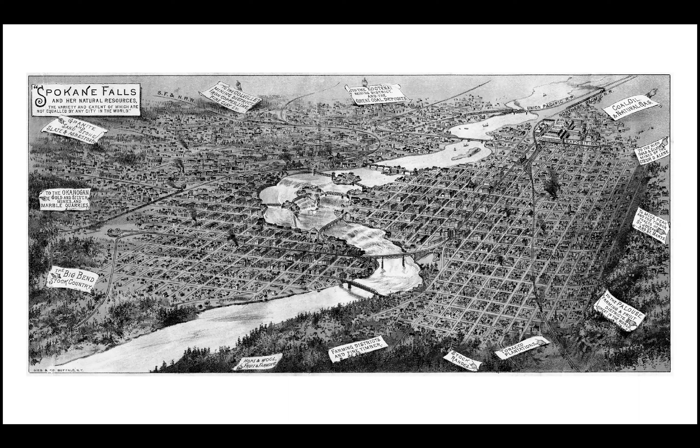Today I will be sharing my project, Apical. Spokane, Washington has always had a strange relationship with its resources. It boasts having so much when in reality it has always been a distribution hub, not really producing anything. All of the resources it claims as its own come from hundreds of miles away.

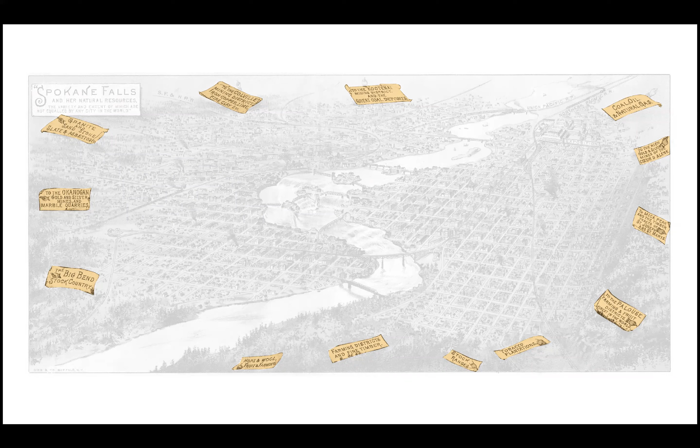This decentralized distribution system is causing more and more problems in Spokane, as well as the rest of the world, as urban centers, which often adopt a similar distribution system, are growing faster than ever before. In particular, food will be an issue as people move away from where it's grown.

This map shows the allocation of farming types on a 25-hectare grid. A filled spot means there is 1 acre of farming allocated in that area. We begin to see the area around the city of Spokane is not farming at all. The square above is the land that would be needed for farming to sustainably support the 2040 Spokane population. This is even more worrying when we take away all farming not for human consumption.

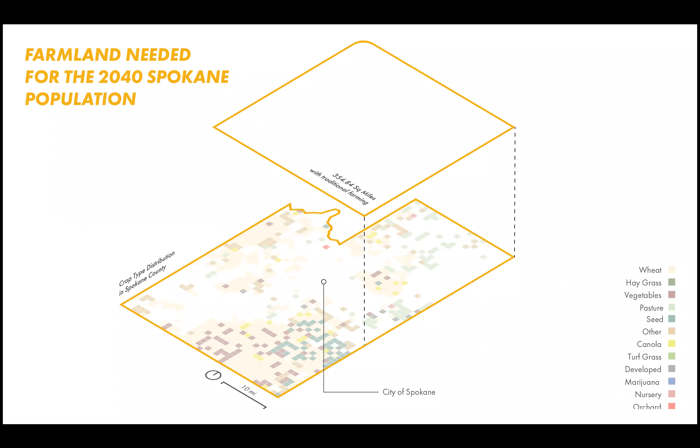Spokane's food issues are apparent within the city as well. The site is located within a food desert, meaning there is no supermarket within a reasonable travel amount. The site is also located in one of the most cost-burdened regions in the city.

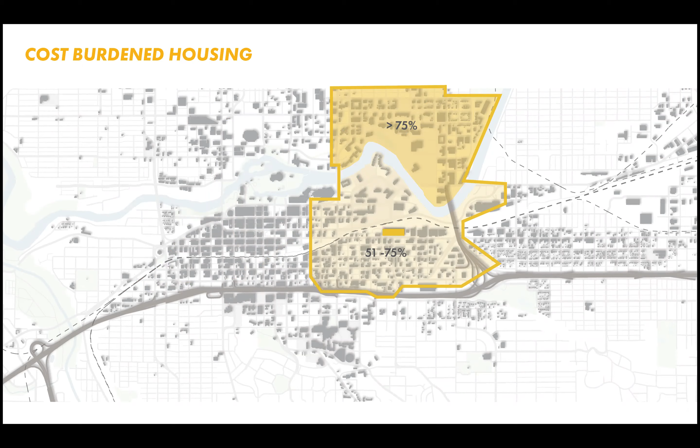When we look at who's living in the area, it is primarily college students there for the universities to the north. Studies find that college students' eating habits have been in decline in recent years, citing that cost is the biggest factor in making poor eating choices. This trend is found in other low-income populations as well.

This is because of the food distribution issues that cities face. 30% of fresh foods are spoiling during the distribution process, making specifically fresh foods significantly more expensive. We can also not afford to waste this much food. It is predicted that in the next 30 years, we will need to grow as much food as the rest of human history combined to keep up with our growing populations.

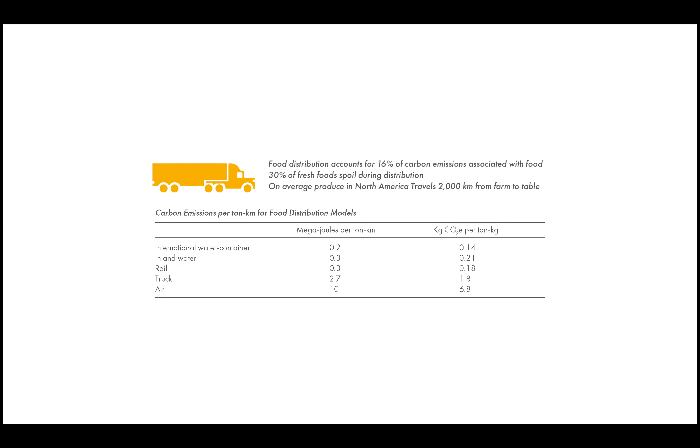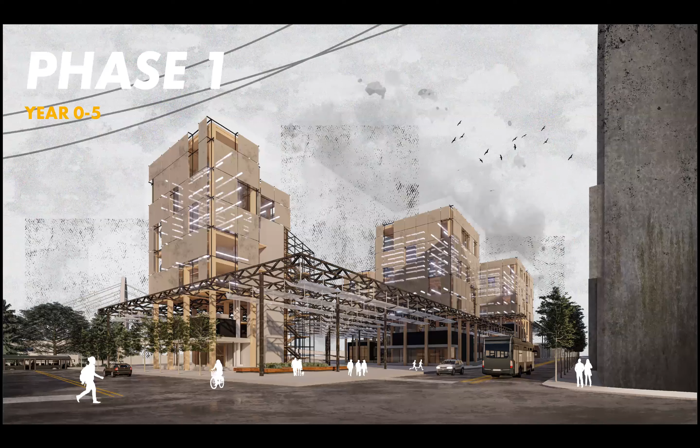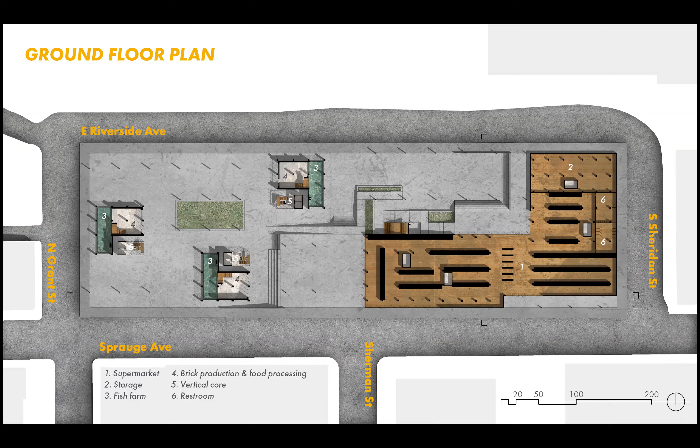Phase 1 of Apical then begins. Phase 1 recognizes the state of flux the site sits within. This current industrial zone is changing to primarily residential and office over the next decade. The first floor puts into place 3 farming towers and a supermarket, laying the food infrastructure in place to support the future residential demand. This fits in with the current industrial neighborhood rather than gentrifying the area with all the housing projected to be needed in a decade.

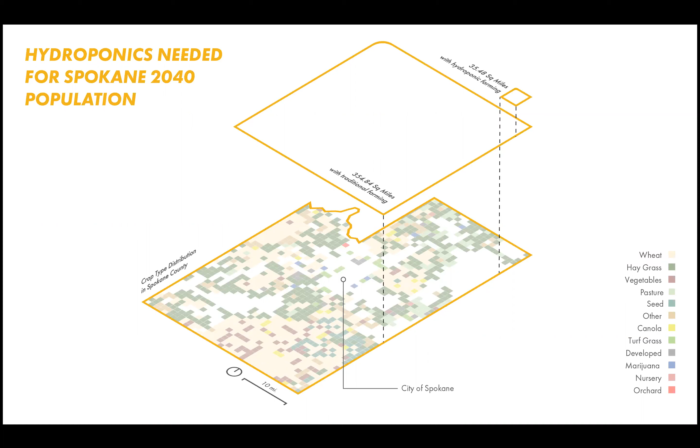Vertical hydroponic farming creates more possibilities for farming to be done within the city because of its extreme efficiency. The area needed to feed Spokane's 2040 population dramatically decreases. Stacking this land vertically in towers again divides the land needed for feeding the city. These towers act self-sufficiently, housing all necessary pieces for food production. Each farm can produce 18,000 pounds of food per year.

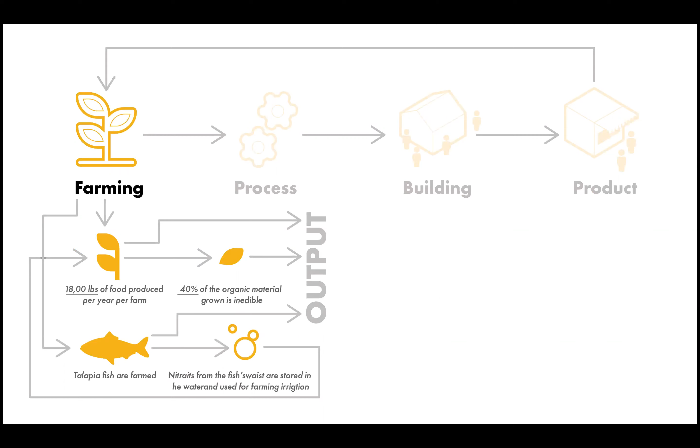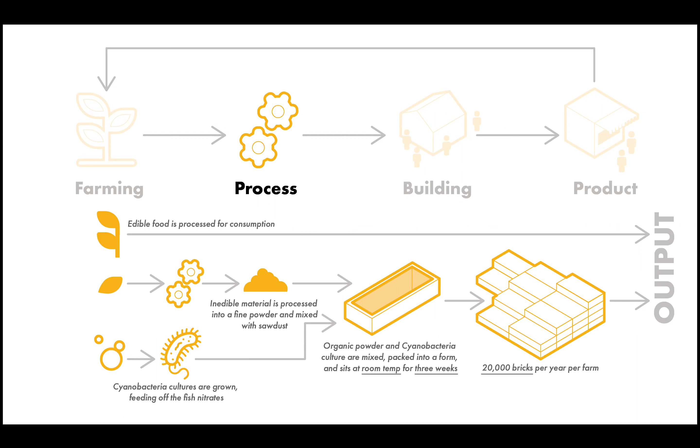Fish are farmed and the nitrates from their waste are stored in the water. This water is then used as both irrigation and a natural fertilizer. However, 40% of the organic matter the farms grow cannot be eaten. This waste matter is dried and ground into a fine powder and mixed with sawdust and the same bacteria that turns sand into coral. This mixture is packed tightly into a form and sits for 3 weeks at room temperature. From this otherwise waste material, each farm will be producing 20,000 bricks per year nearly passively.

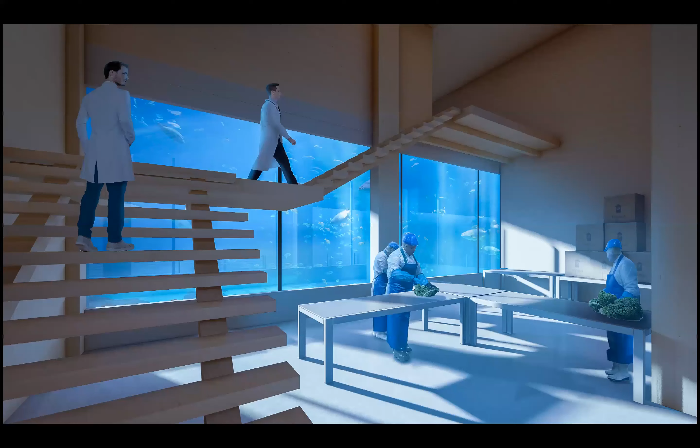These bricks begin to take a farm-to-table concept of distribution and put it vertically on the site. The towers use radial carousels for energy efficiency, maximizing the footprint of each farm. The fish farming is put on display both in the public spaces, becoming a public aquarium, and the interiors of the farm as well. Once bricks are being produced, phase 2 can then begin.

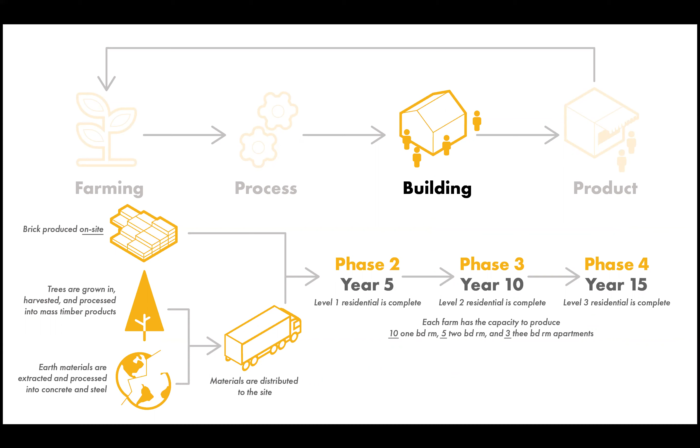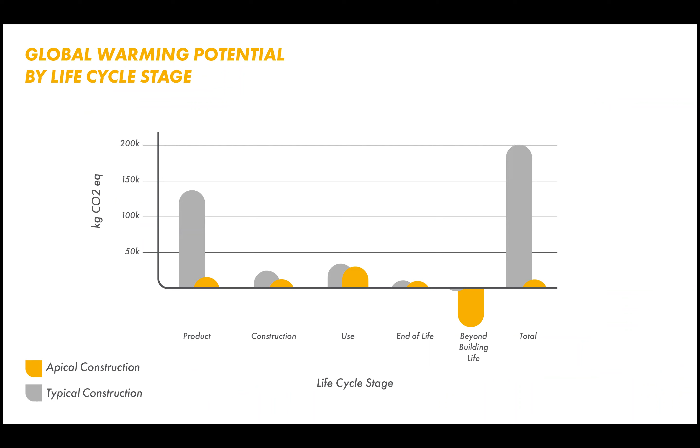As bricks are produced, housing can slowly be built from them over a 15-year period. This starts to create a new entirely on-site life cycle for a large portion of materials used in construction. By farming and producing these bricks from the waste from the farm, the residential units combined with the farming towers have a fraction of the carbon footprint as only the residential units would have if built with typical construction methods.

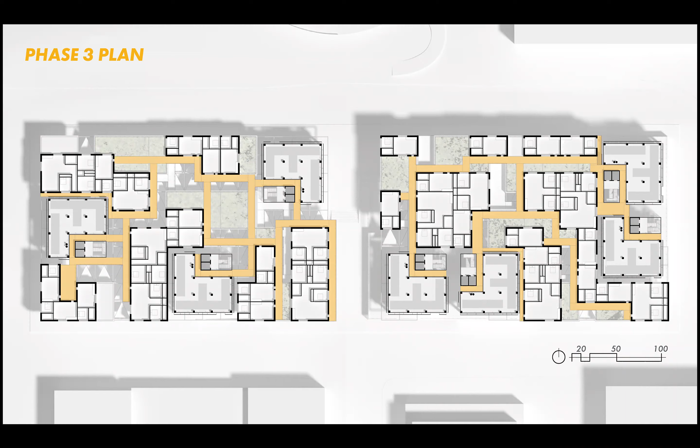Phase 3 starts at year 10. We begin to see the residential come together. The units and plan are designed as a set of details and relationships rather than a fixed floor plan. This way, the form and program can adjust as the needs of the community will inevitably change over the 15 years of construction. The units in this way act more as a suspended neighborhood rather than an apartment block.

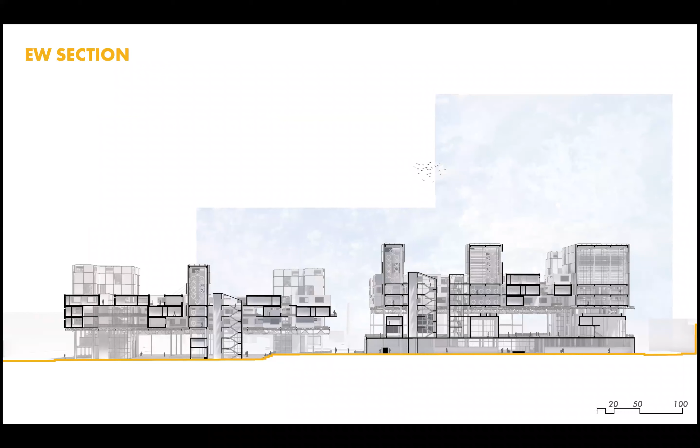When construction is finished, the building enters phase 4. Here we see the total of the building's production. The bricks produced after on-site housing is complete can be used for more housing projects in the area as a cheaper, carbon-positive local alternative. In section, we can see how the farms act in structure as a platform for neighborhood growth as well as a means for their material production and the direct connection the residents now have with the farming infrastructure.

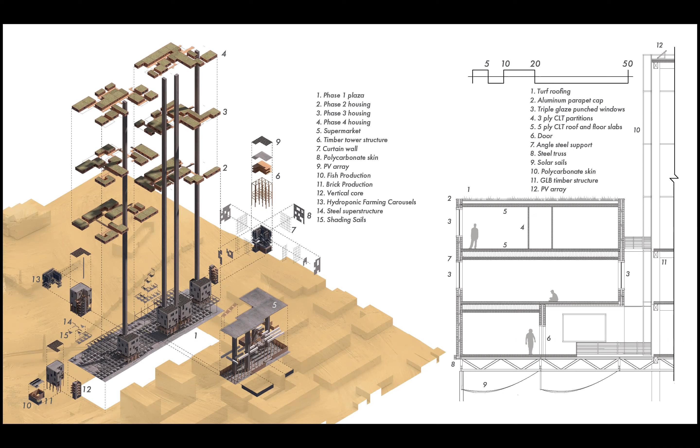This building typology is not bound by this particular site because each farm tower can act independently. This methodology can be scaled up and down to address the housing and food inequalities that plague so many people. If an open lot has room for one tower, it can quickly, effectively, and sustainably begin to produce the food and materials that bring the right of healthy eating and living to everybody.